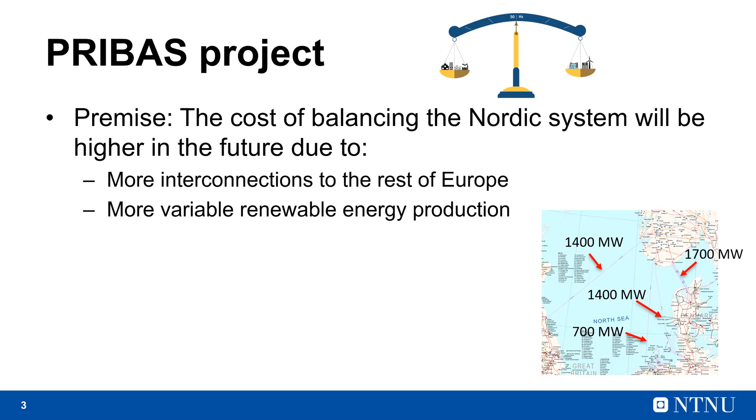My PhD at NTNU is part of a bigger research project called the PRIBAS project, funded by the Norwegian Research Council. The premise is that the cost of balancing the Nordic power system will be higher in the future due to more interconnections to the rest of Europe through HVDC lines, and more variable renewable energy production in the system. There are already quite a few HVDC lines connecting Norway in particular to the rest of Europe, with plans for perhaps another line to the UK. So the question we ask is, how can the Norwegian cascaded hydropower help provide flexibility to the system as a whole? Because the Norwegian power system is dominated by flexible cascaded hydropower with a lot of storage potential, so it's very tempting to use this for balancing purposes.

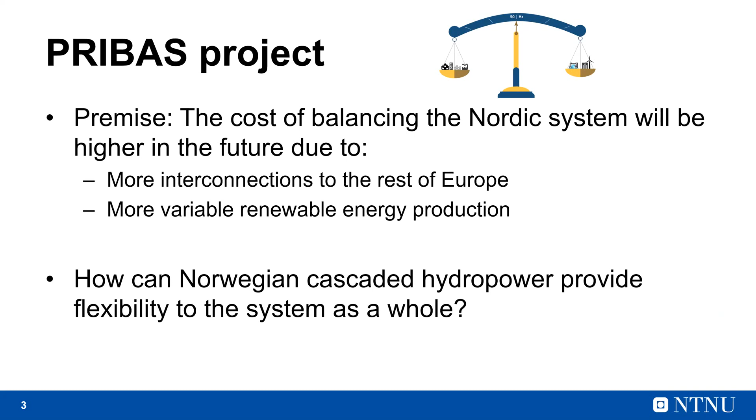In this work, we looked at structural imbalances and tried to model them in a fundamental way. By structural imbalances, I mean deterministic imbalances created by the structure of the electricity markets. In the Nordics, the electricity markets are cleared in hourly intervals. Sorry for interrupting, I think sometimes you get further from your mic, please be always close to the mic. Thank you, sorry, I'll try.

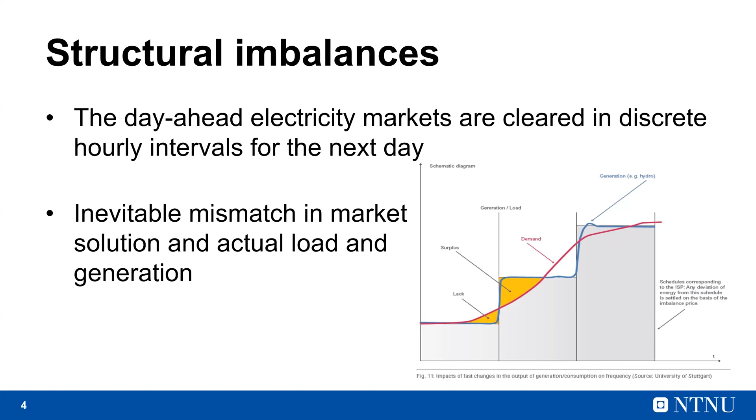So you have these mismatches essentially between the demand and the market clearing schedule. In a paradoxical way, this can be worsened if you have a lot of flexible production like hydropower, because it is actually more or less able to follow the given hourly schedule due to its fast ramping. This can create quite a large mismatch, which gives you frequency issues.

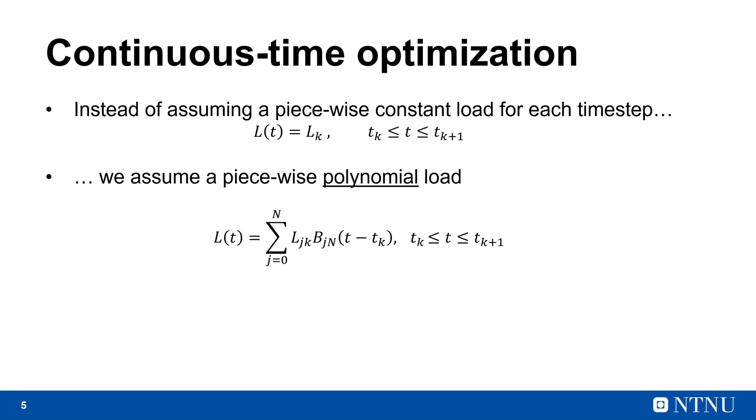So we tried to model this using continuous time optimization, which is a fairly new thing in power systems. The main idea is that instead of assuming a piecewise constant load for each time step K, we assume a piecewise polynomial load. For each time step we describe the load as a function of time using basis polynomials B of some chosen degree n. We have coefficients L, J, K for the load in each time interval that describe the shape of the load curve. These basis polynomials are Bernstein polynomials, which have this shape, and we use them because they have nice properties that allow us to reformulate the optimization problem in terms of the coefficients of these polynomials.

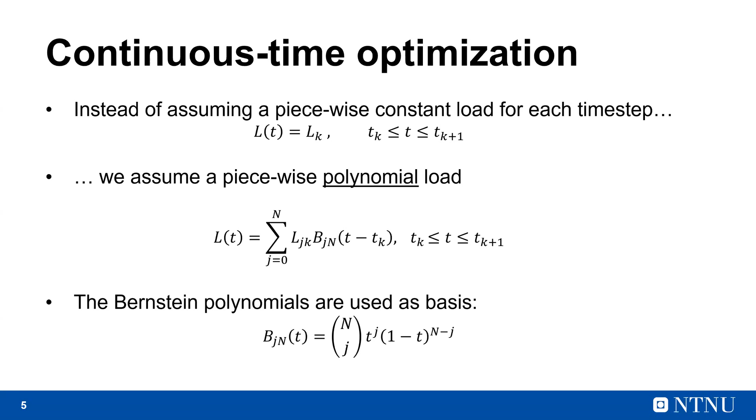And the important thing here is that you can actually bound the Bernstein polynomial, which makes it possible to also implement inequality constraints.

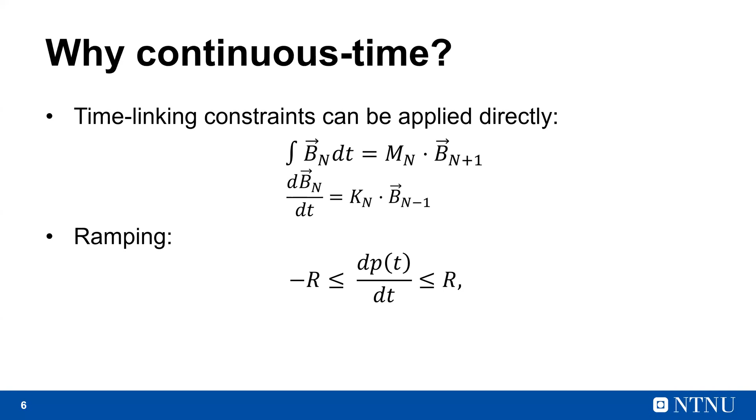And why continuous time? Well, an important thing is that you can apply time linking constraints, which are related to integrals or derivatives directly on the function or variables. When you integrate basis functions, you just get basis functions of a higher degree, and the same when you differentiate. So all of these are just linear transformations, which means that ramping for thermal generators can be applied directly to the derivative of the production variables to bound those.

And also for reservoir volumes or energy content, you can measure the volume increase by integrating the net inflow into the reservoir. So these types of constraints are fairly easily handled in continuous time, and one of the main advantages.

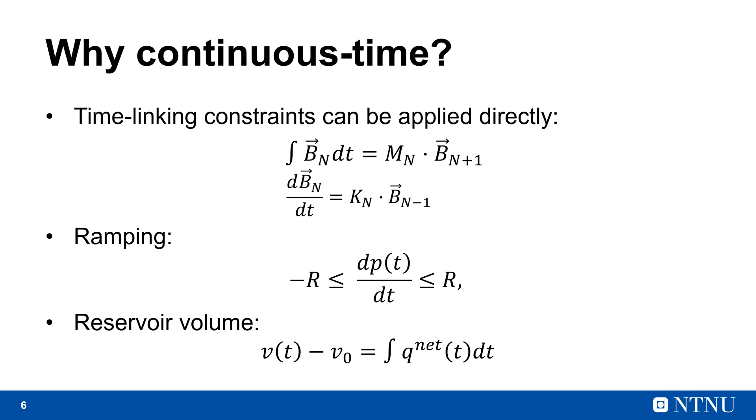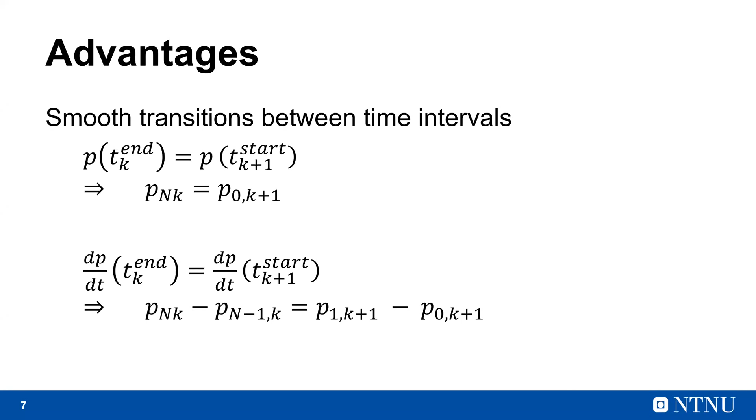Another advantage is that you can have a smooth transition between time intervals, which means that you can say the production at the end of a time interval has to be the same as the production at the start of the next interval, by just equating some of these coefficients, giving you a continuous production curve. You can also do this to the derivative so that you have a smooth production curve across intervals, which is the whole point here, because we're looking at structural imbalances with sub-hourly variations, and so we want this kind of behavior.

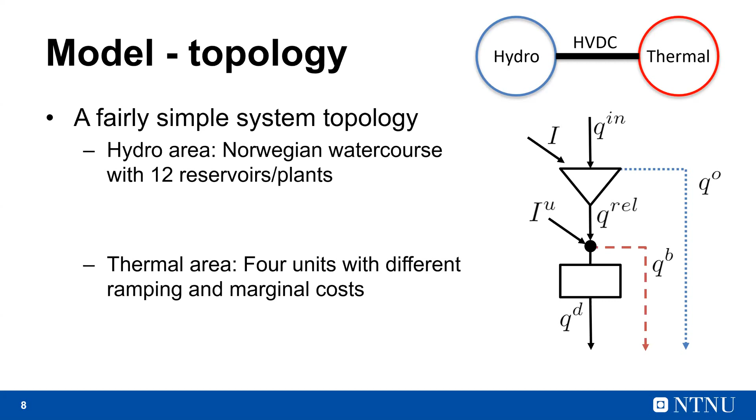So for the load data that we put into the model, we used data from the US. In the thermal area, we have this red load curve. The smooth curve here is the continuous time curve, which we find by applying a least square error fit to the 5 minute underlying data we got from California ISO, while the dashed red line represents the hourly average of the same data. So you see this is the famous duck curve from California, which has a lot of ramping down in the morning and ramping back up in the evening as solar power comes on and off.

While for the hydro area, we have load from New York.

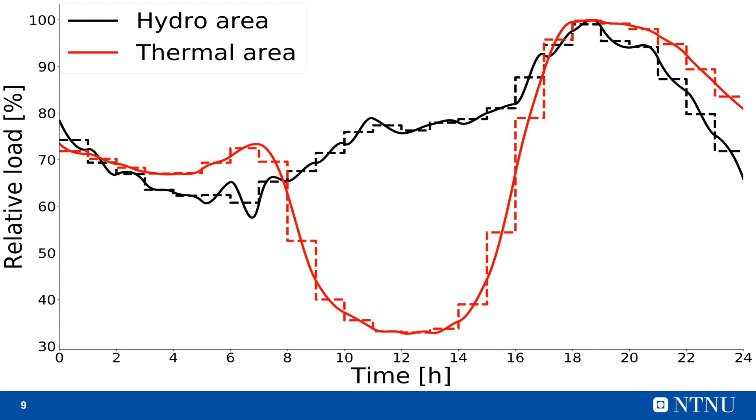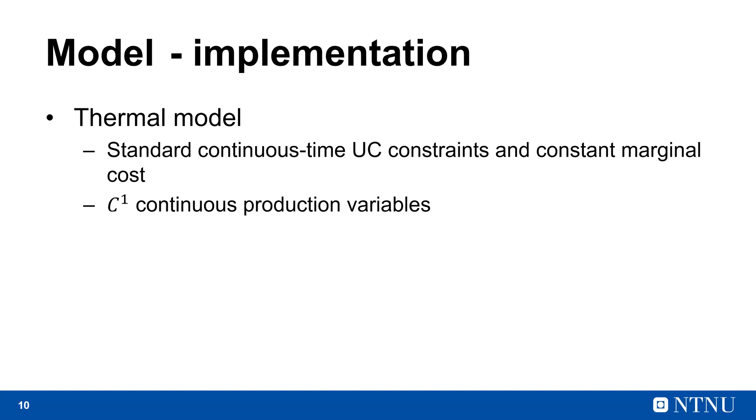So the modeling here in the thermal system is modeled with the standard continuous time unit commitment constraints and ramping, constant marginal costs. And here we apply these C1 continuous production variable constraints, which means that we have smooth transitions between interval changes. And because we have this smooth operation between interval changes, we need to modify the commitment constraints.

This is the idea in continuous time: you allow the unit to smoothly start up from 0 and ramp up to above Pmin, which is 20% in this case, within an hour or within an interval. So you allow the thermal units to ramp up their production, or equivalently ramp down their production to 0, using a whole time interval. This can be a typical production pattern for a thermal unit.

While in the hydropower, we had to do some modeling - we have all the topological constraints for the water balance, as well as some cut description or water value description for the opportunity cost of using water. We also have these linearized production functions that relate the discharge of water through the turbine to production. This is a very nonlinear function, and it is usually linearized in optimization models. But in the continuous time framework, it turns out you actually need some extra binary variables to make this work, because you need to make sure that you use these linearized segments in the right way, so you don't start using segment 2 before segment 1.

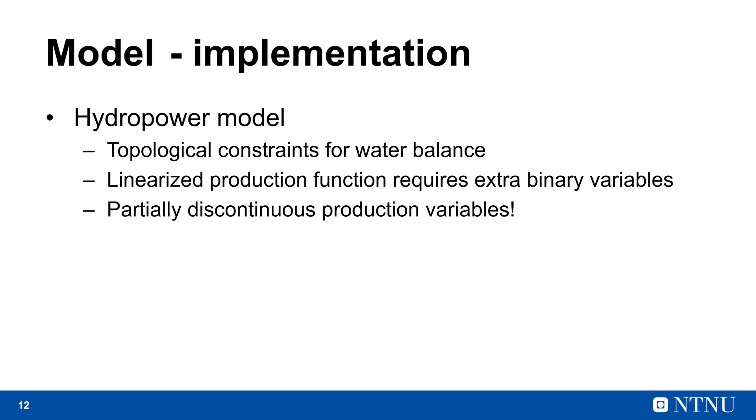And an important thing here is that we allow partially discontinuous production variables, which might seem counterintuitive - only for the hydropower. So a hydropower unit might operate something like this in our model. The red line is the production curve. So we actually allow it to have discontinuous startup and shutdowns, like at hour 14 here. This is because, as I mentioned earlier, hydropower units can actually almost start up and shut down discontinuously in the real world - well, at least within some tens of seconds or maybe a few minutes.

So we implemented this in the continuous time model to retain some of the flexibility of the hydropower units, because it's very unlikely that anybody will operate a hydropower unit like I showed you for the thermal units. Nobody will actually run a hydropower unit between 0 and Pmin for a whole hour to ramp up.

So this might seem like a pretty big relaxation in the model, but actually it is more accurate, I would argue. So when the unit is running, it still has to be continuous, but we also allow it to have...

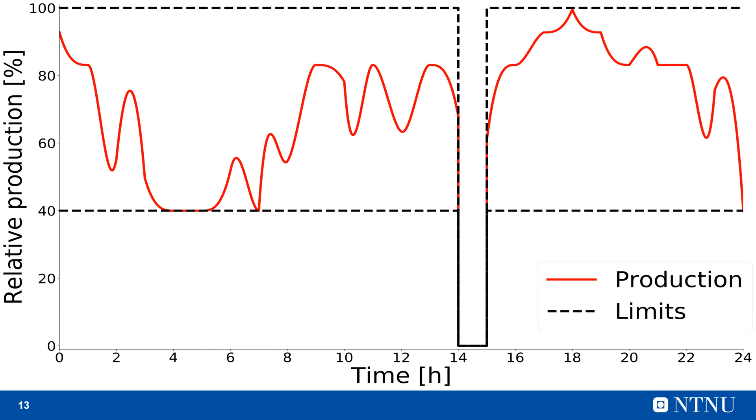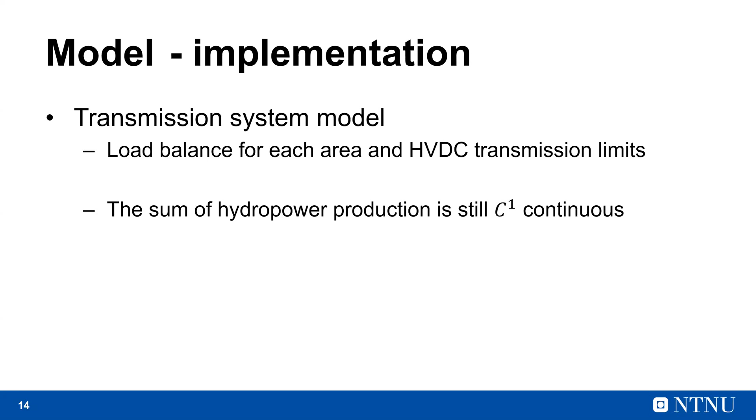So finally, we have the transmission system model. We have a load balance in each area and transmission limits for the HVDC lines. And this also forces the sum of hydropower production to actually be smooth and continuous, even though the individual hydropower units can have discontinuous production curves. And of course, we also have an objective, which is just to minimize the total system costs.

So when we run the model, we run the continuous time model, and also an analogous hourly model, which is what we are all used to, shown as the dashed line here. So you see in the thermal area, in the hourly model, you would actually turn off all the thermal units when the load is ramping down and then turn them all back on in the evening. But this is actually infeasible or extremely costly in the continuous time model. So here you keep the base load running for the whole day.

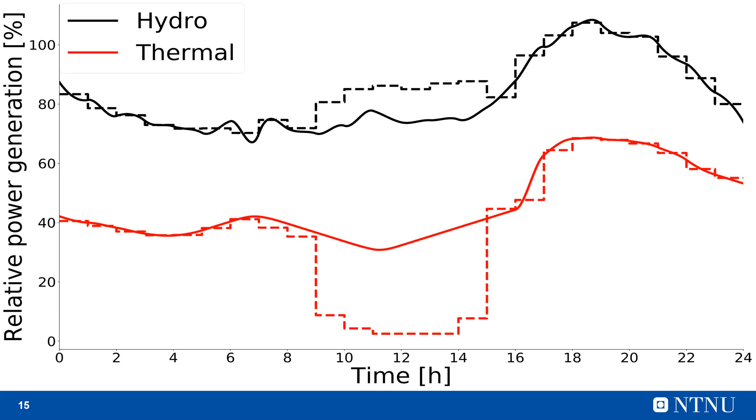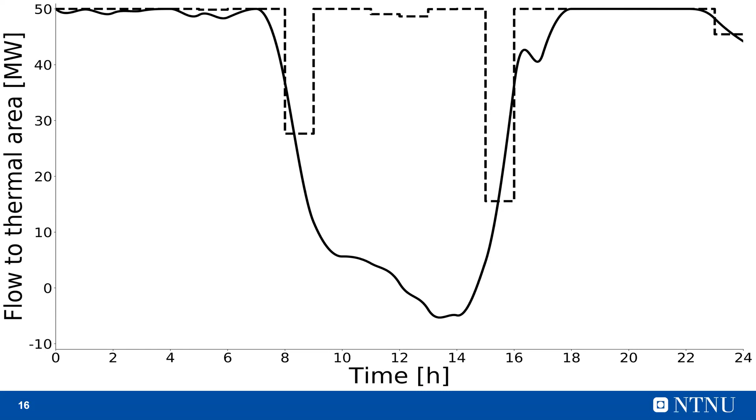So to conclude, the discrete time model, or the hourly model, overestimates the system flexibility. In that model, the hydropower mostly provides cheap energy for the system, trying to export as much hydropower to the thermal area. While the continuous time model can capture and realize that the ramping problems are actually quite severe, so the hydropower provides both cheap energy and ramping flexibility.

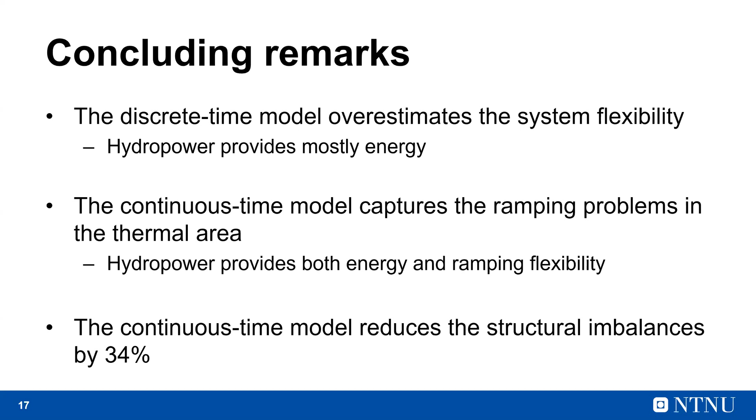And because the continuous time model data is a better fit or better approximation to the underlying minute-level data, we get less structural imbalances in the system. So they're reduced by about 34%. And that was it, so I hope I didn't go too much over time.